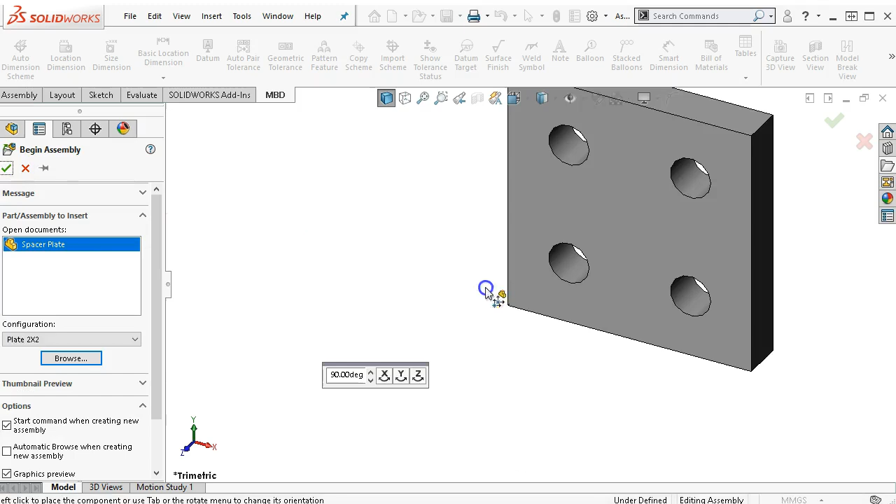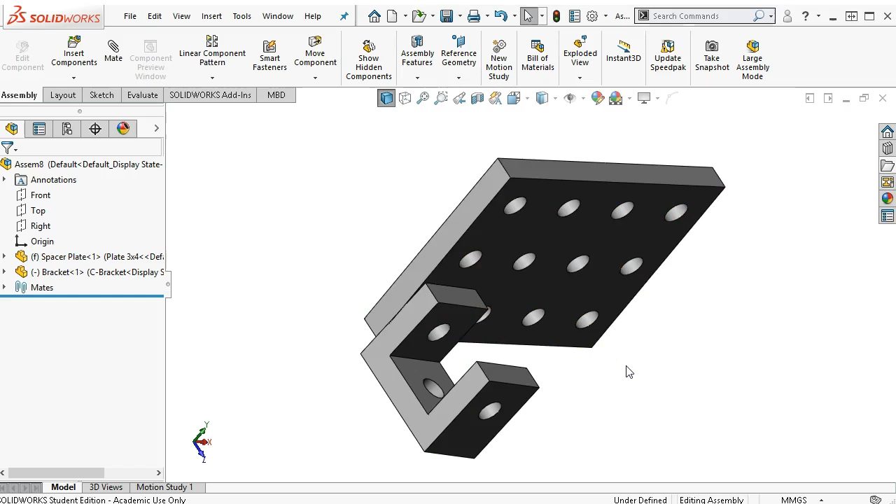Okay, so then the bracket, go back over to the assembly, insert a component. For the bracket, I'll probably go with a C. And then that can be the position. Go ahead and give it a parallel so it keeps it from rotating. Okay, thought I hit parallel, apparently not. Okay, make sure it has a chance to catch up then.

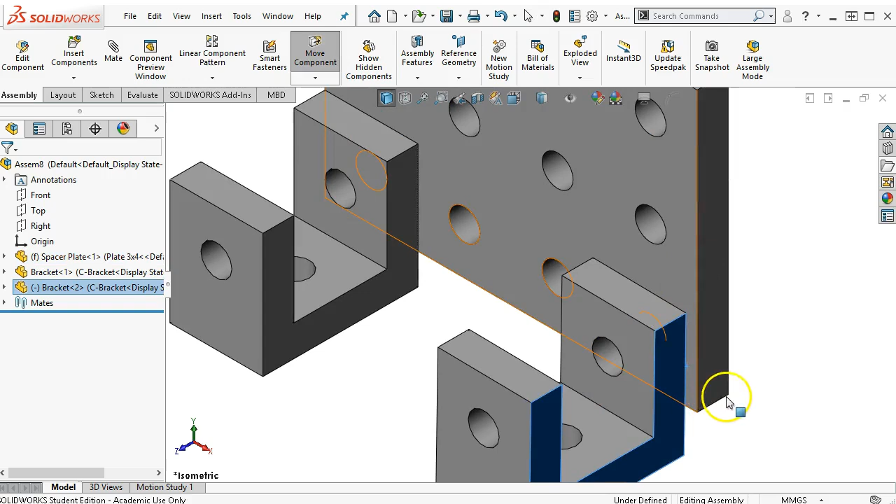Do the control select, we'll go to the other side, and it's not quite cooperating on that one. Alright, so if we can't get it to cooperate, we'll go ahead and apply it. Alright, so I either need that gap or to rotate around. Probably would have seen it if I'd brought it over. Alright, so 3x4. And then I'll bring in another.

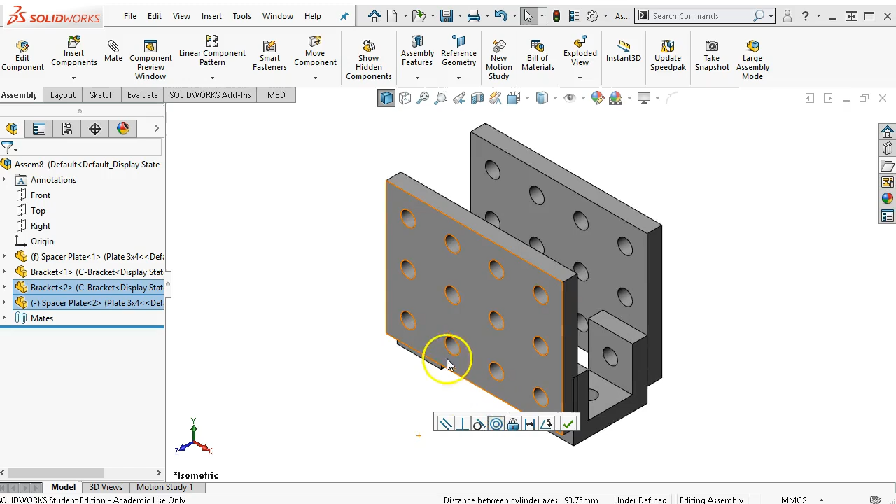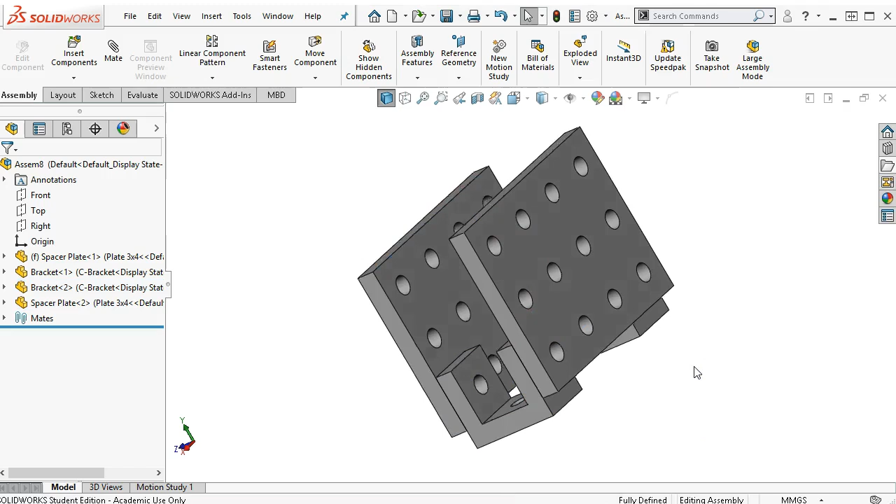And we'll go with the Concentric. Alright, so that's able to rotate and move. So we get the other Concentric in. Now at some point we start thinking about how we're going to put this together if it were not for pins. And so one of the, either a tooling plate or what kind of structure I'd want to use for this.

So right now with the pins we're going to be able to come both ways, but if I was to put threads on this side, then I would need to be able to go through. And then positional, well, we're going to have a little bit of positional tolerance on that size. Let's go ahead and bring in another bracket. I'm going to switch this one over to a Z-bracket.

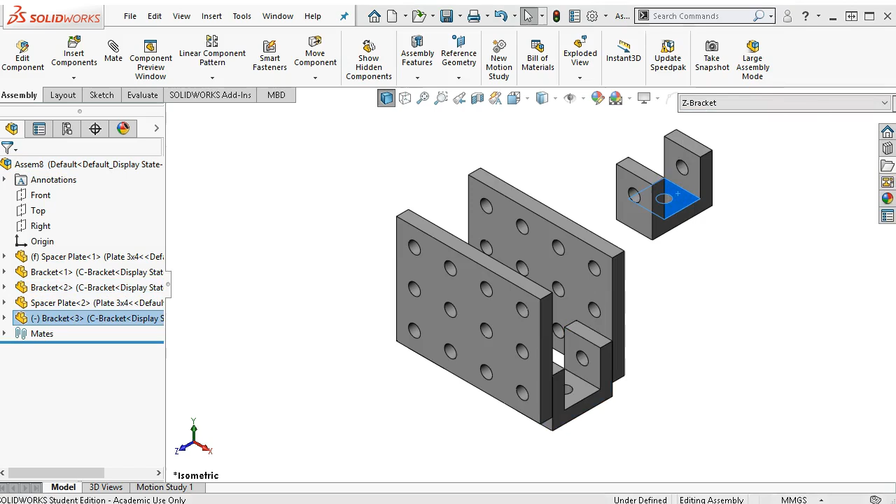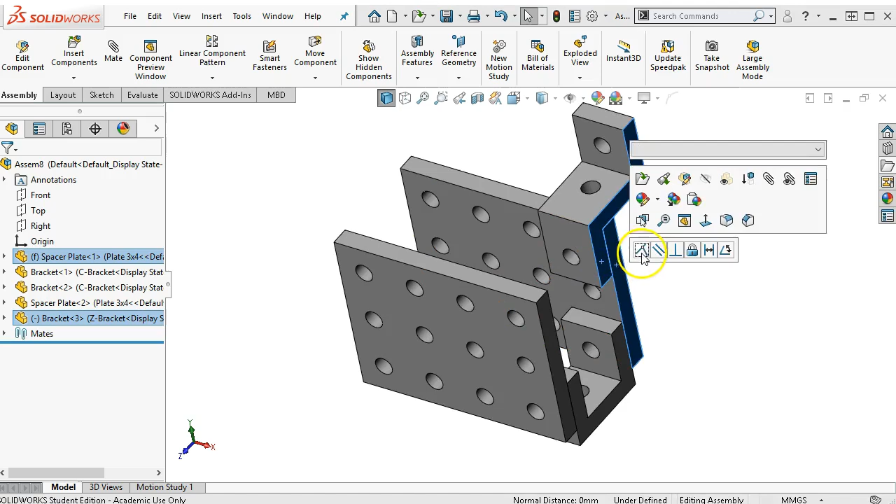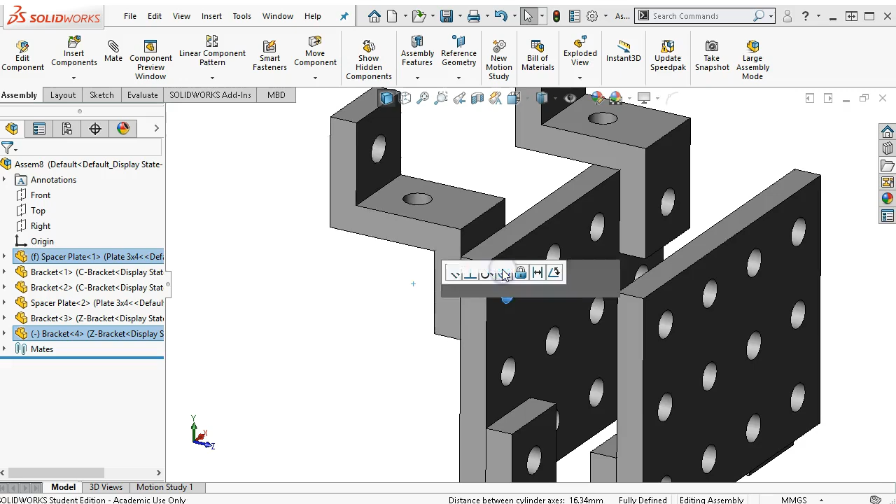And we'll see if we can get the stack-ups to work. And would like to have a few little changes be able to make along the way. So we'll see what this lines up as. Okay, and then the outsides can stay concentric, or coincident, parallel. Whichever. Okay, so not picking up that one. Alright, so I'm still kind of expecting it to pick up the mate references, but I might be making it too complicated too.

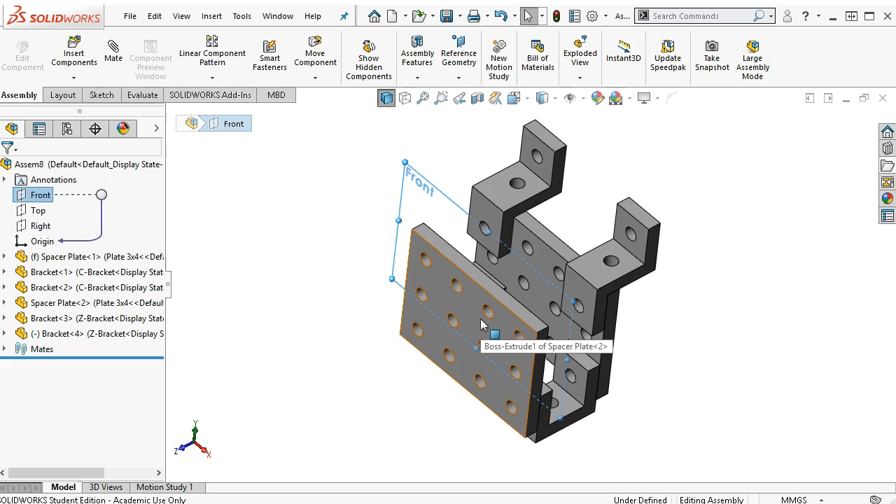Alright, so we need the spacing. Alright, so the front plane is on the back side of the part, so that doesn't help me with the stack up. I was hoping to be able to make a mirror, and in that case I really wouldn't need this other plate, at least right now. So maybe, just maybe, I'll go ahead and suppress that out. We can always remove the mates and come back to it.

Alright, so if I wanted to mirror all of this over, and there's symmetry and it's not going to be a left and a right part, then I would need to have some reference geometry. There we go. Plane. And thinking about it. Alright, so first reference. Let's see if we can set this up as a mid.

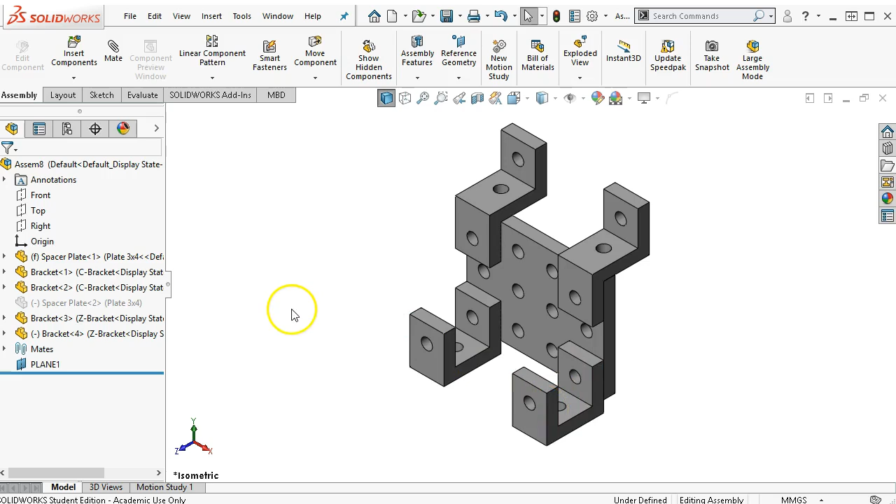And then if I pick the second reference to the outside, then we have a mid plane between the two surfaces, and that would give me something to mirror across. So even though I didn't set it up that way with the planes, we can make it work. Alright, so that gets added to the mix, and if I go over to a mirror components, the mirror plane is the plane that I just created, or if one of these would happen to be convenient, we would stay with that. And then we'll go spacer and the Z.

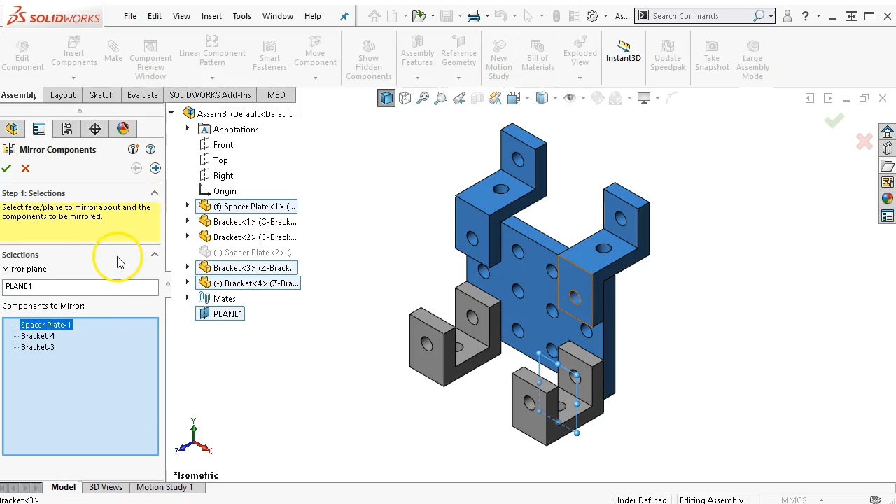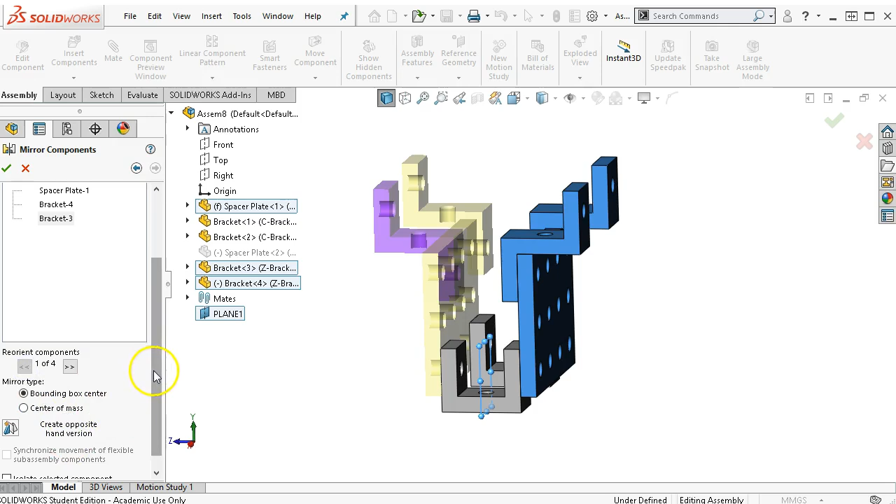Alright, and then available solutions. On occasion it will shift around. So as it moves things around, I think we're okay. And no, I don't want to create an opposite hand version. So if we needed a left and right, for whatever reason, it would create a derived configuration of that part and apply it.

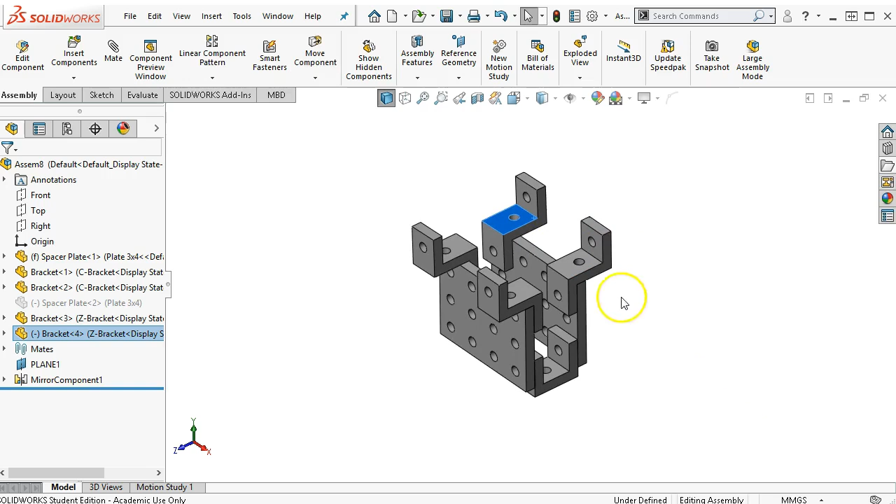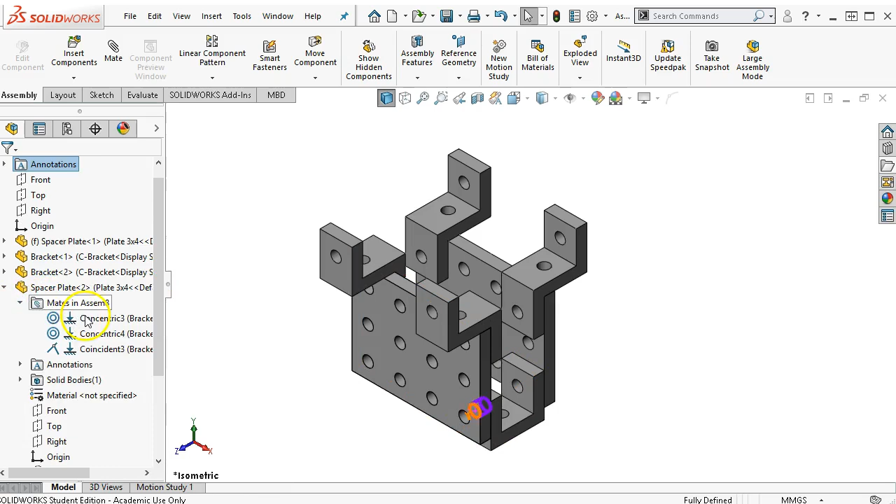Okay, so the fourth bracket, that one didn't pick up a coincident, even though I thought I got that in there. Or the parallel. Okay, so that one doesn't need to move. And then the spacer plate, if I were to unsuppress that, it's going to be a duplicate. So I need to just go ahead and get rid of its mates. So doing the shift select and then delete on the keyboard.

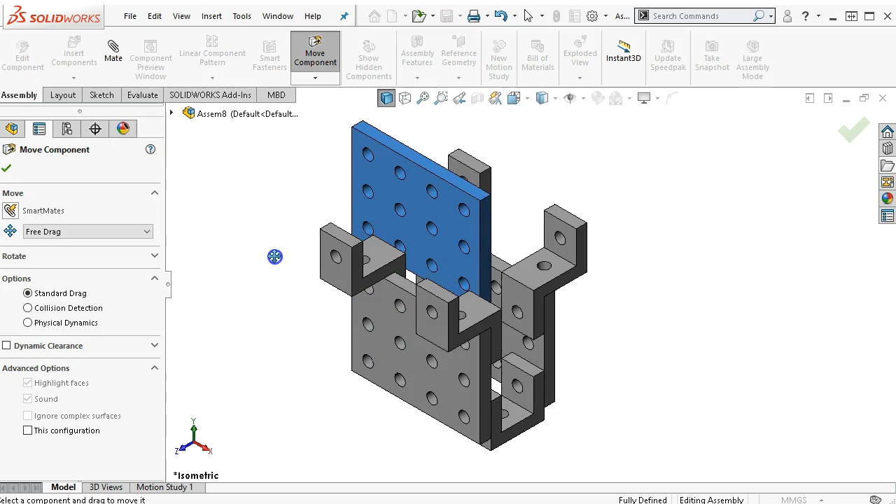See if the computer can catch up here. And we'll give it a yes to all. Alright, so since they're one on top of the other, I'm going to do a move component. Alright, and then we can stack. Let's see, I'm still in move, so that's not going to help me. Let's see if we have an angle.

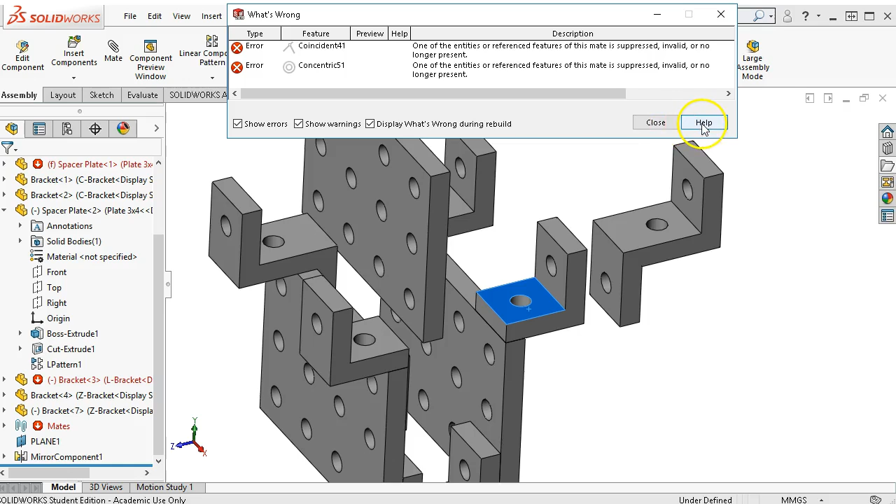Yeah, that's kind of what I wanted to see, is if I was going to be able to stack these up one way or the other and get back to where I could, let's just go with an L bracket. And it did it to me again. Got to remember to change components. Alright, make sure I've got the correct component selected before I switch over to my L bracket.

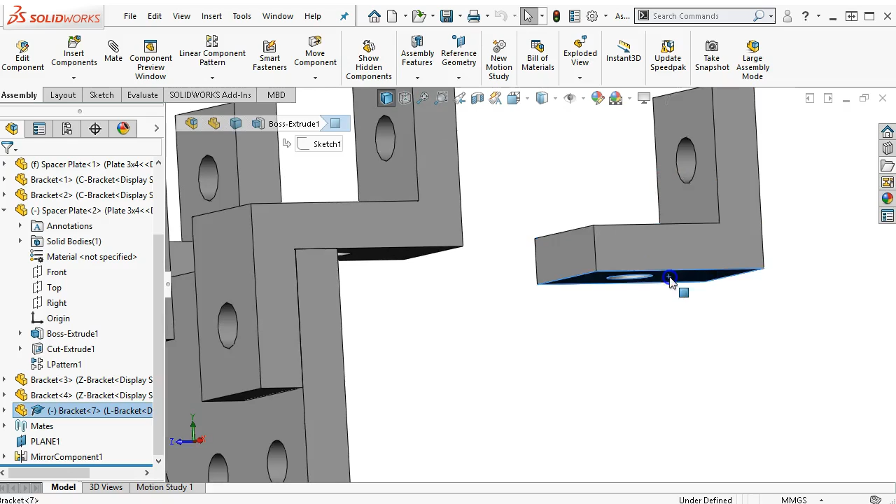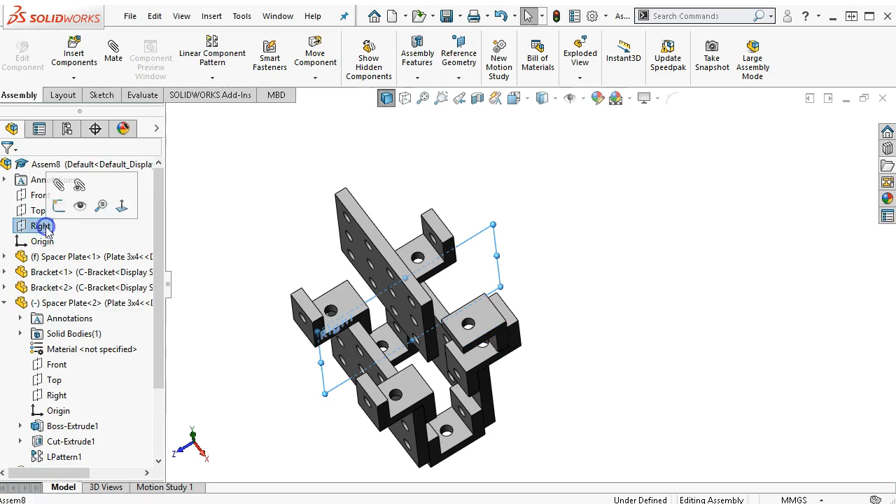Alright, so I'm going to line those up. We'll make that concentric. And then I don't really want to set the depth just yet. And I don't think we set up to be the right plane. I don't want to get too complicated. Well, actually, no. I'm going to say I don't want to get too complicated on the planes just yet, so

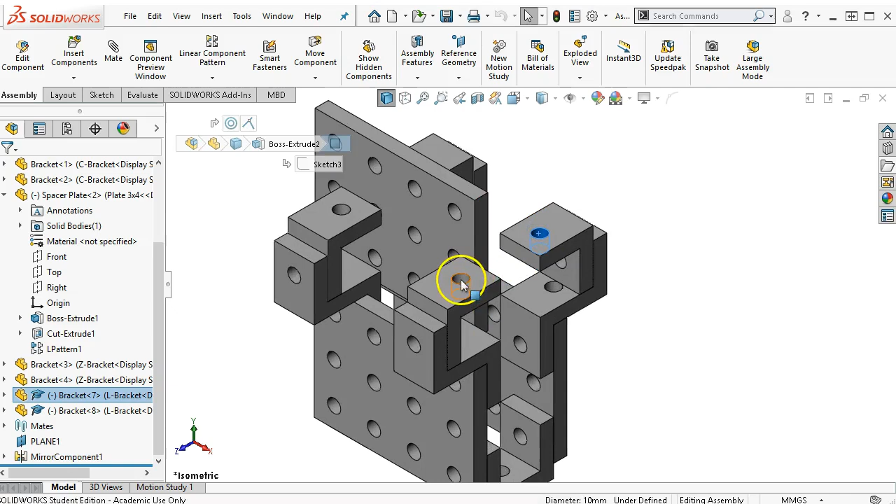alright, so they were saying 12 pieces. And we're pretty close to there, so even after I've created the mirror, I can go back into that mirror and add the components. So if I want to bring the L brackets in, and we go ahead and accept. And then the question would be, did I line those up to where it's on an even? So about 60 millimeters, that should bring it back up to the plate.

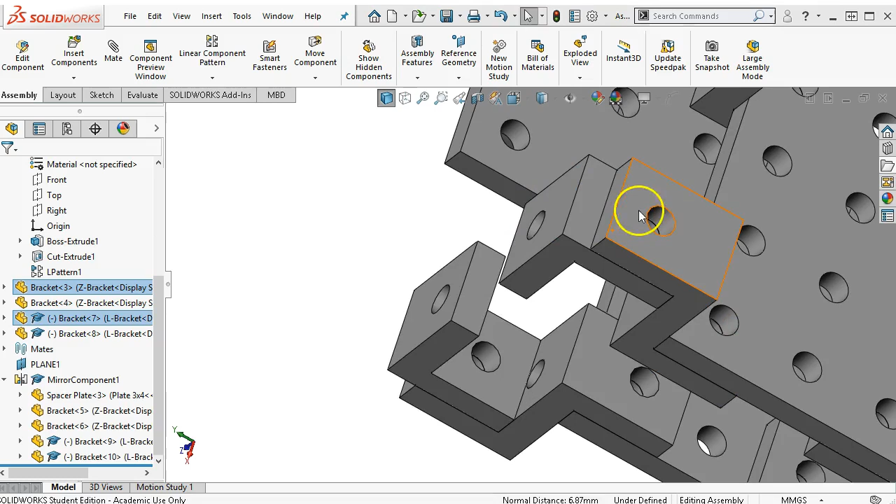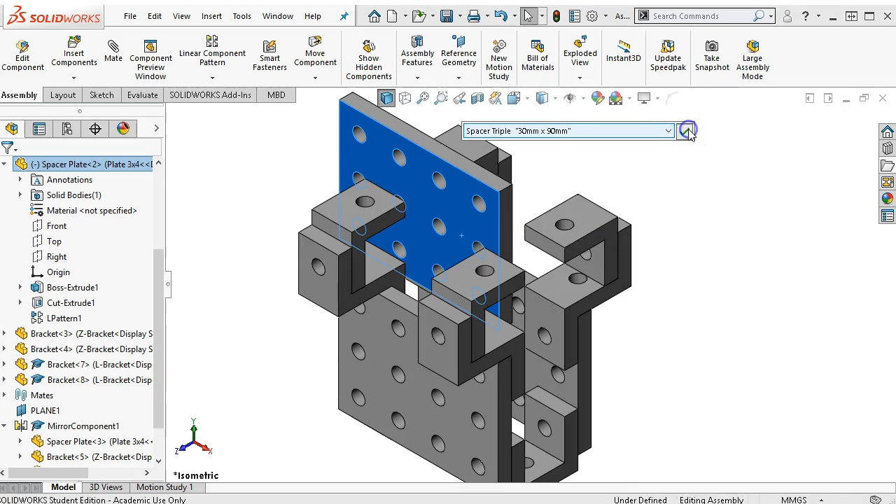Alright, so that being the case, I'm going to make that coincident, which will also make the mirror coincident. Okay, not sure what it had selected there, or if I got ahead of it. I'll go coincident with that one as well. And then this will go over to a triple. Yeah, still not sure what it's picking up there.

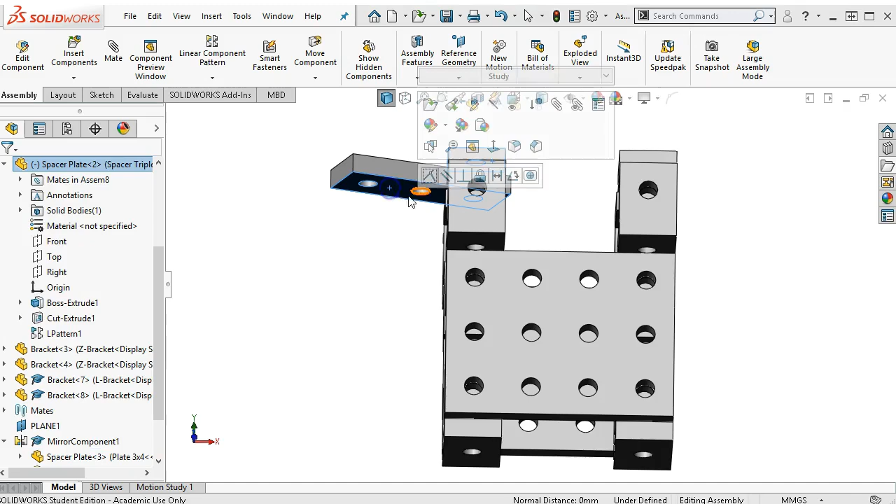Alright, so almost like I'm getting some ghost mates in there. Now I got a little bit of a lag on the screen, so those will be coincident. We'll see if my concentric stayed. Alright, so one of them stayed. I'll give it a chance to catch up. Alright, that looks good.

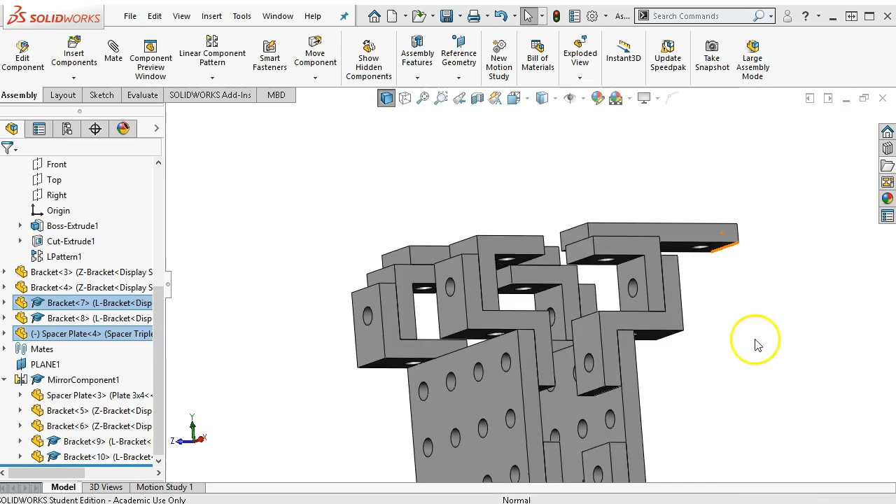Alright, so one more time, coincident. And the recommendation was to do 12 items. And I want this to be at least a little bit complex, so when we do the exploded view, create the drawing, bill of materials, all that kind of stuff, it has some complexity to it. Alright, those are all built up. Don't think anything's going to move.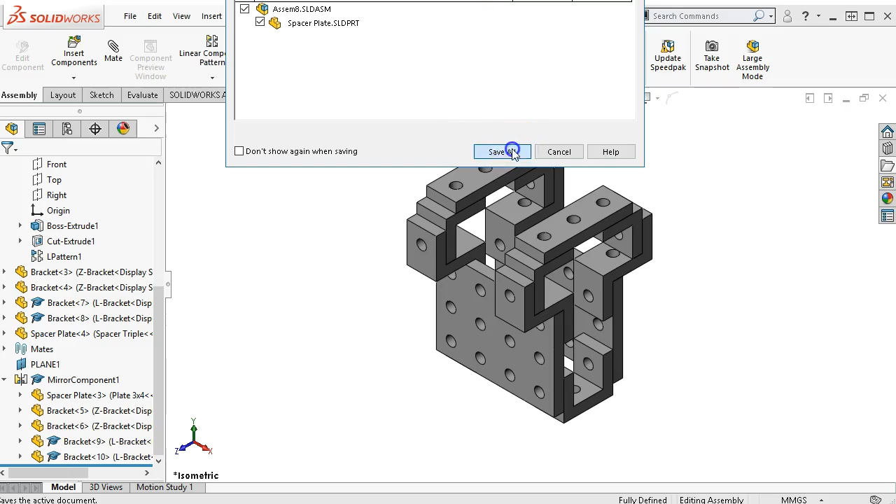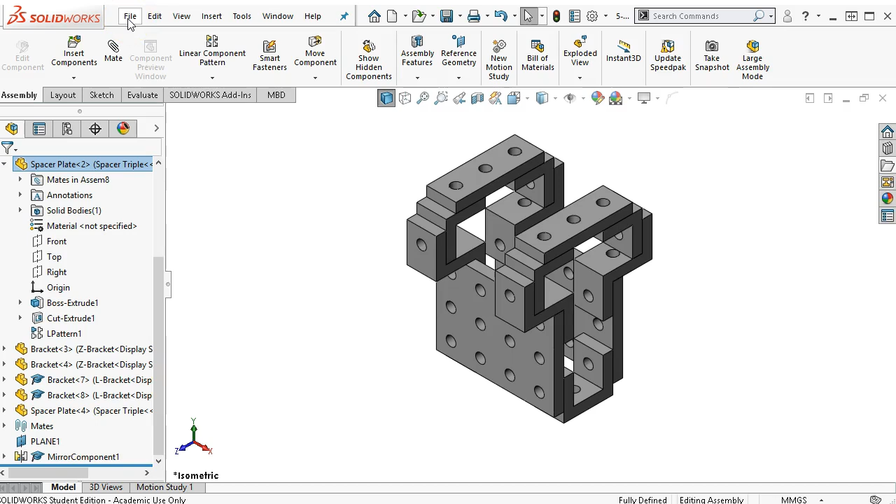So this is going to be my 5-9 sub assembly. Alright, so as we build this up, then we can add more components. Alright, so what makes a subassembly is that if I made 2 or 3 of these, or different combinations of these, when I bring them up to the next level in the assembly, these become subassemblies. So at this level, it's its own assembly.

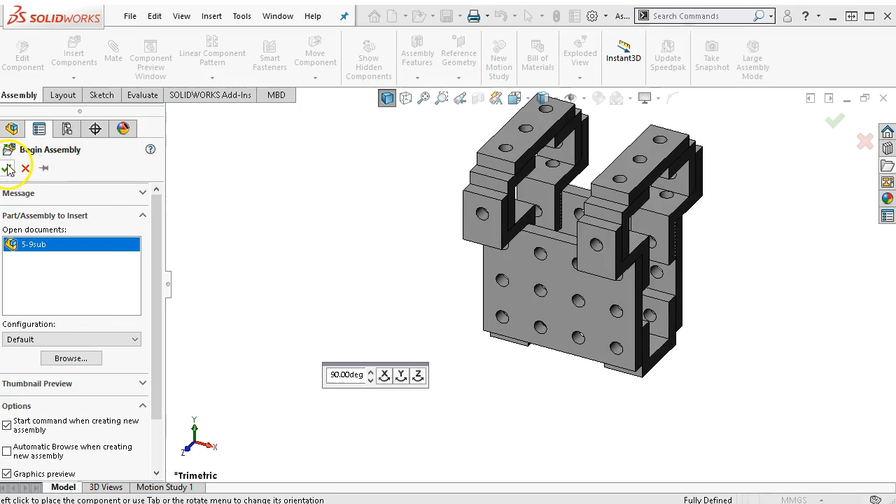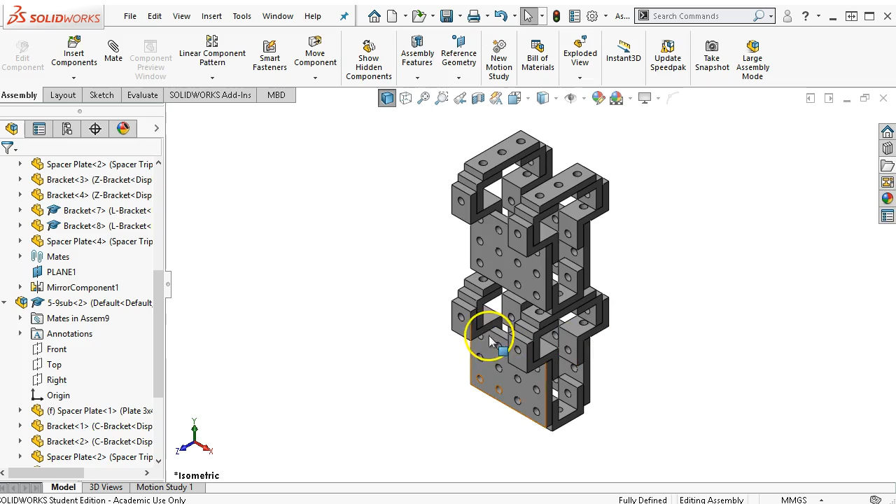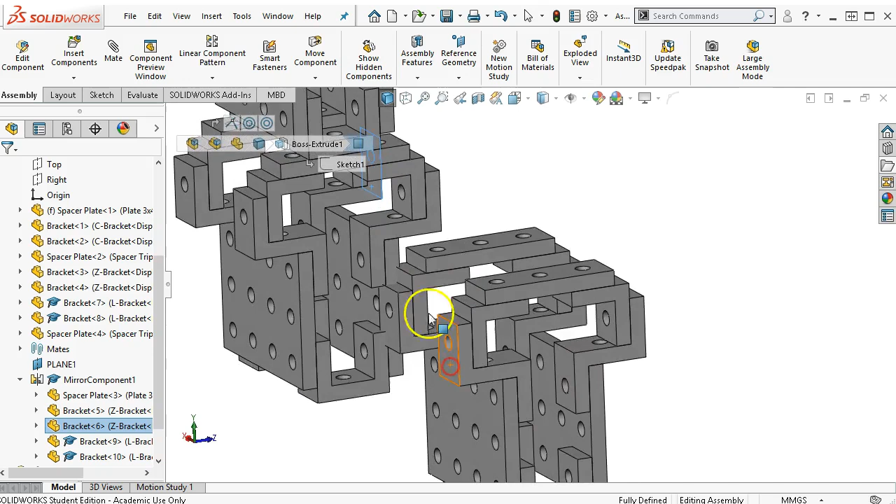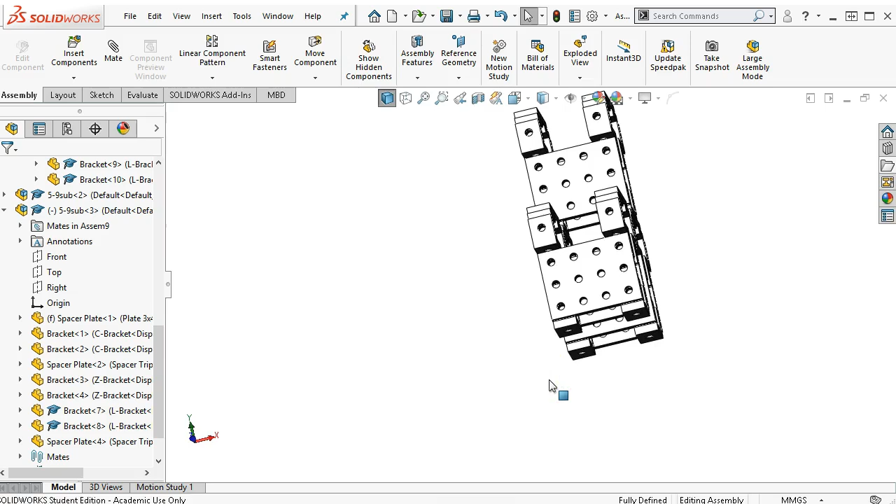Alright, so every one of these that I bring in, and probably if I'm going to get too complicated with it, the mate reference would be handy. And I lost that surface, so let's go. Okay, so I don't think we're going to go with all the pegs because I just made this way too complicated to go to the 40s as well as all of the 20s and the 30s, and so we'll just stay with the shapes.

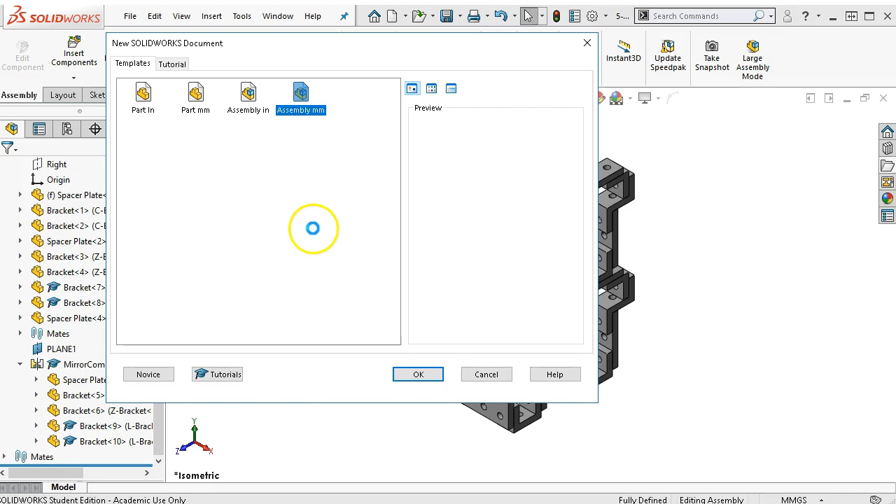Alright, so we can keep adding in subs. And so if I go 5-9 assembly. Alright, and then if there was a higher level assembly, we would have to give it a name as well. But it depends on how I'm organizing these. But just for an example, this becomes a subassembly, and as each of these changes or has different components added to it, then they naturally get more complicated.

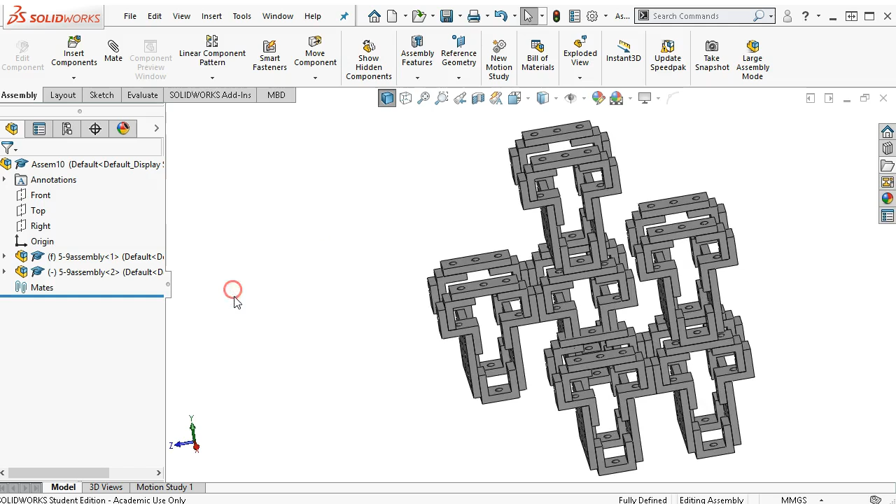So as we keep bringing these in, at some point it's going to be a test of the processor as to how well it can manage it. Alright, so if I get enough of these, then at some point I'll want to consider another pattern. And so the linear component pattern, we need to pick up a direction and a distance, probably in the 100, 120 range.

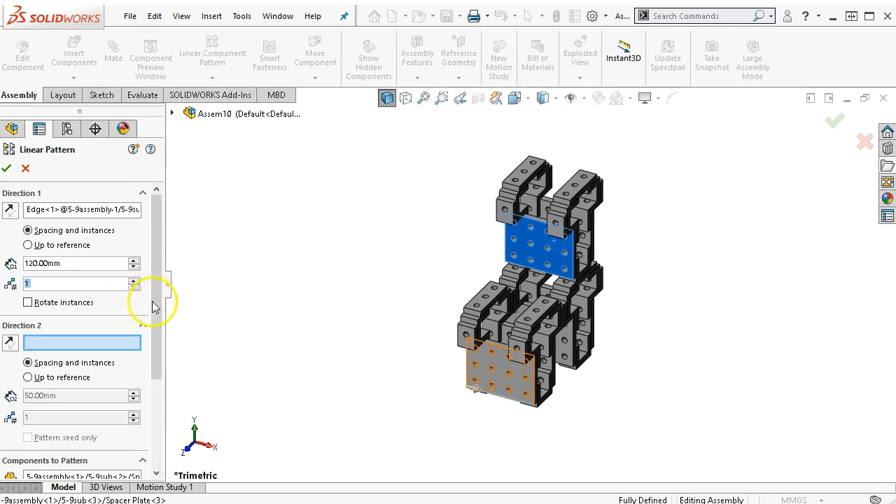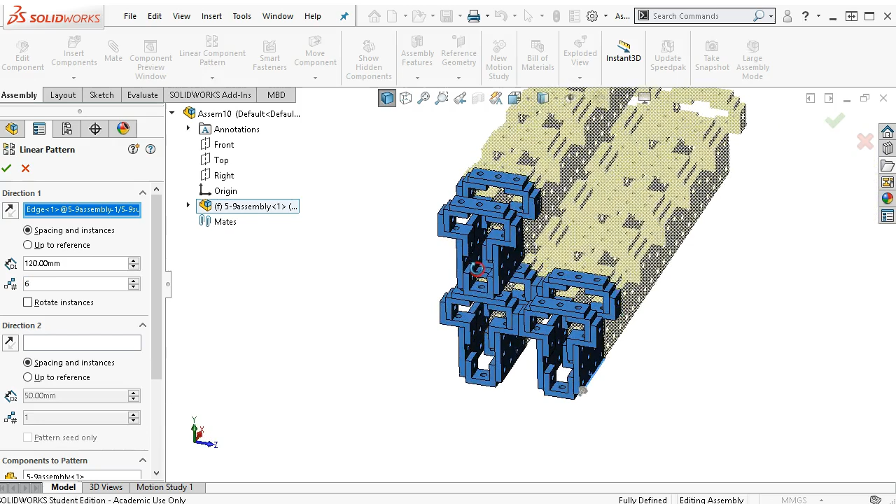And the items, just make sure everything's selected. We have the edge, and as soon as we go more than one, we're going to be able to stack those up. And then the other distance, I'm not quite sure of, but we will figure it out.

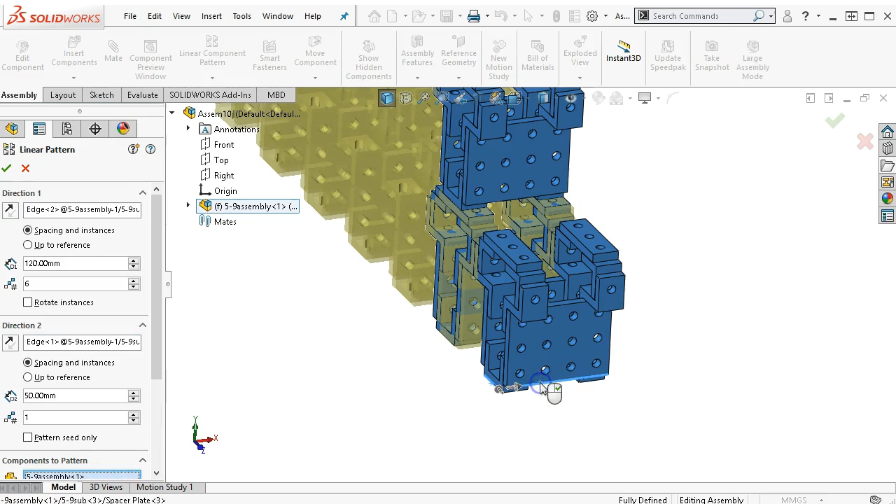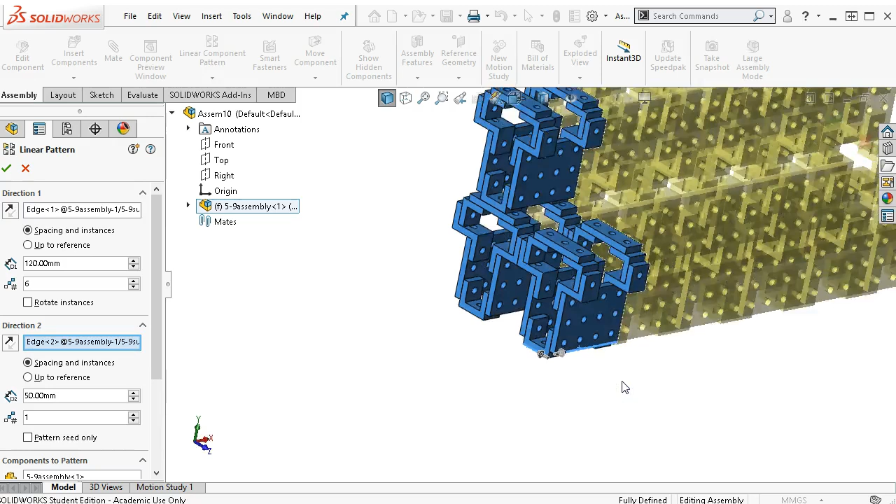Alright, so it needs to... I'm not sure why it turned the other way. I haven't... Alright, got a little button happy, or computer is still struggling. Alright, so edge 2 is going to be 3 units that way, and that one's probably going to be on the order of 200 and some odd millimeters.

And if I hit the tab, it's going to update. So another 20. Alright, so I can make these as complex as I want. And they're going to get really busy, and it's going to take up a lot of resources to run it, especially when we do the hard edges. So it looks pretty cool, but I don't really need that one.

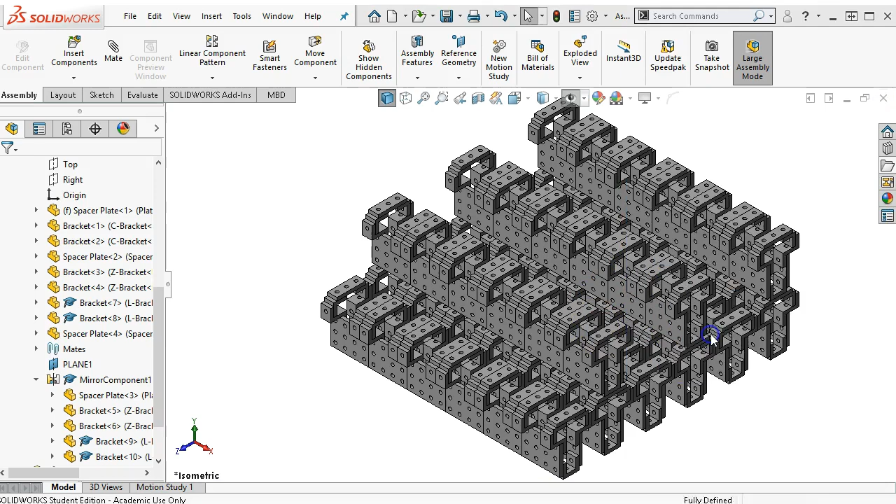And it just switched over to large assembly mode, which means that we're over 200 or 500 parts, so it's not going to resolve everything if it doesn't need to. So let's not save that one. And I really am not that interested in this higher level assembly, other than if we want to create an exploded view of it, we have the choice of just doing the sub-assemblies, the 3 components, or we go back to this level and we make our exploded view here.

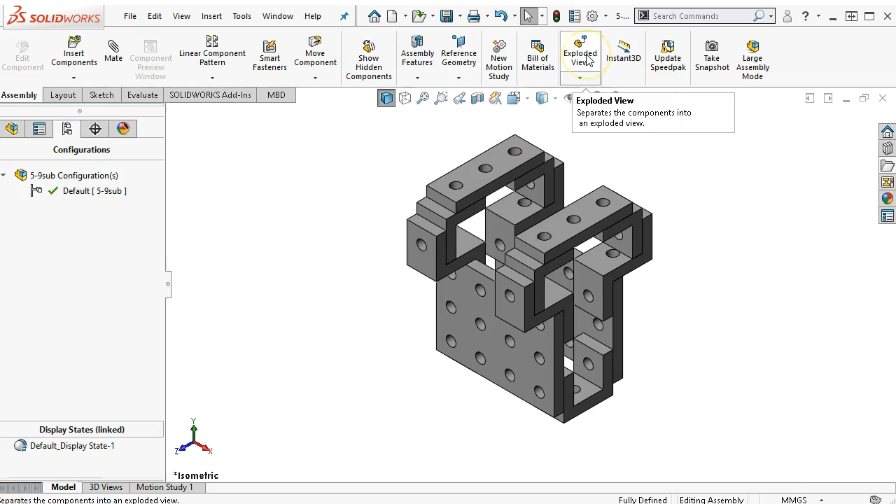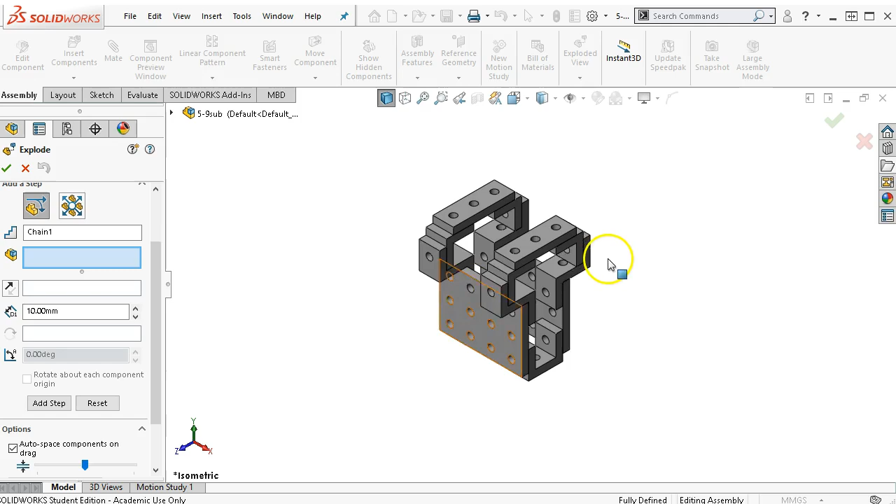Alright, so under the configuration is where the exploded view will end up living, and we want to actually initiate it. So the things that need to go up, we have a chain 1, and right now we're set to auto space the components, so I do like to try and check that one first, and then this is the relative position between them. So for this, in chain 1, I'm going to pick up our components, trying to make sure I'm not grabbing the arrows. Doing a pretty good job of picking the other things over. There we go.

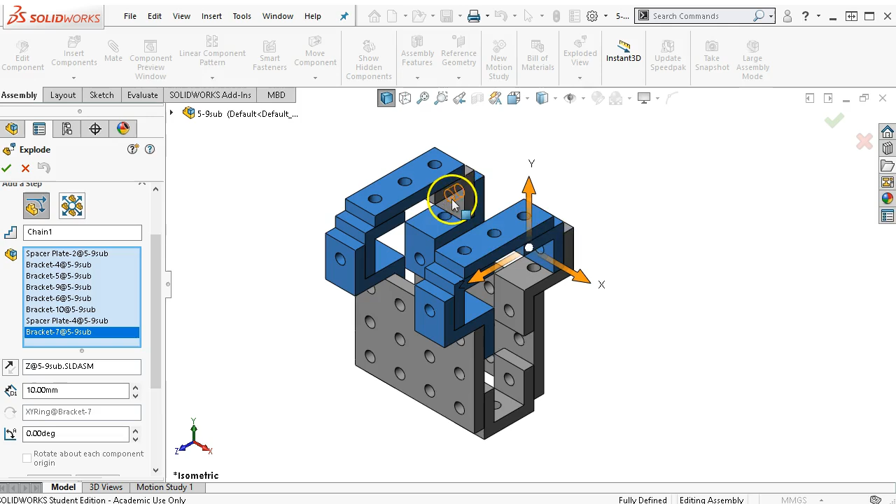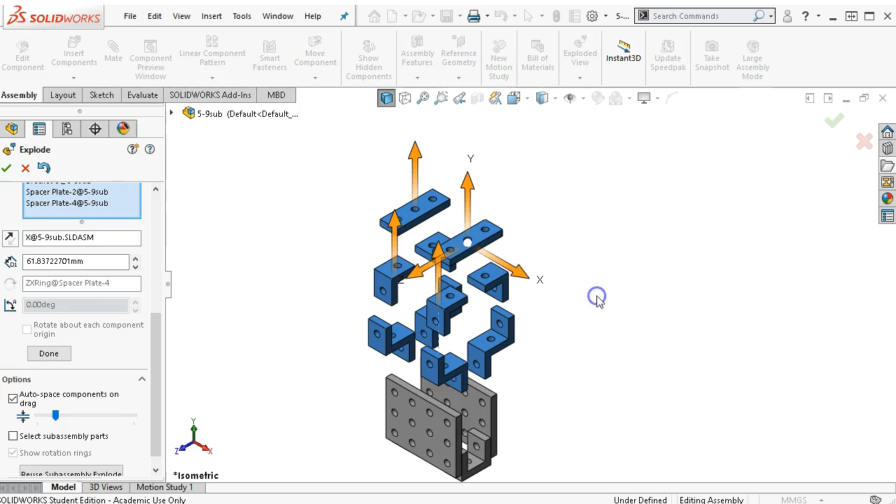Alright, so if I drag that out, then that gives me the spacing, and it picks up the brackets, picks up the chain, and then if I auto drag the spacing, I can move them up and out a little bit. And we still have the arrows, so I don't want to get too carried away. If it'll let me, nope, it's just part of the mix. Alright, so we'll call that one done. Oh, and then it shifted on me.

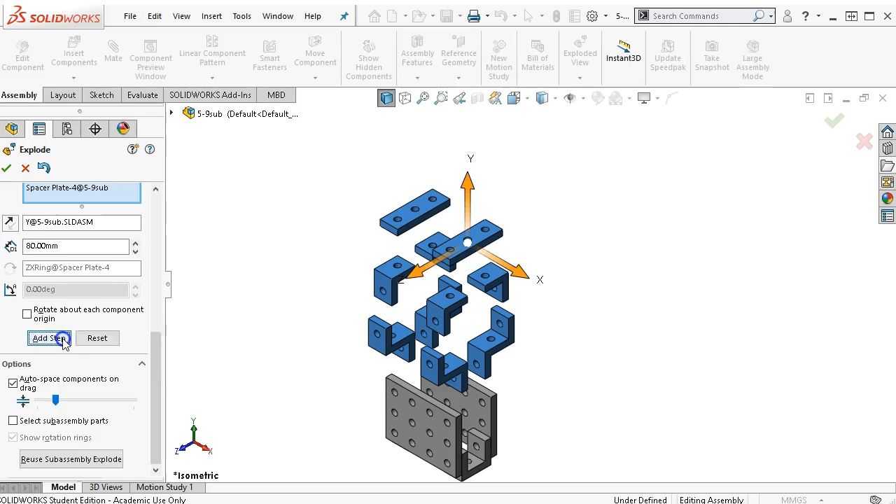So distance, let's go up 80 millimeters and a little shift, and it is in the Y direction, 80 millimeters. So, alright, and then if we need to, we can close up or work a little bit on those. Alright, so the individual pieces then, since I'm not going to auto drag, we'll just go with, be careful of the rings, because those will allow the component to rotate.

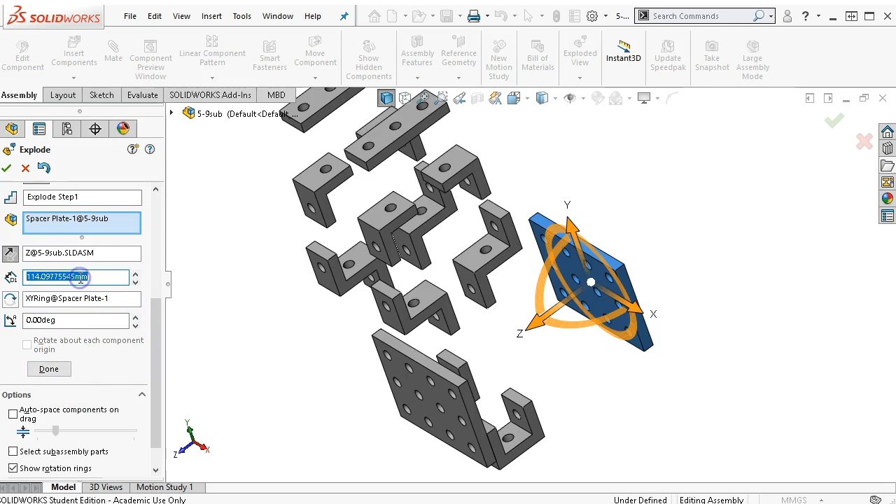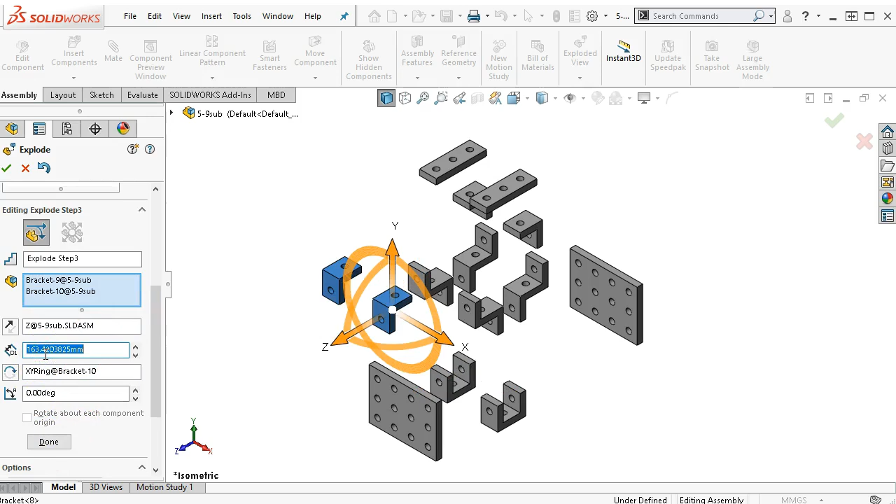Oh, pick that one up. I should have clicked to done. So let's undo that one, and we'll give it a distance of 100 millimeters. I kind of like the symmetry. And done. Okay, and then a few more components. Maybe we'll take these two and pull them out of the mix. I don't know that I'm making it better at this point, so maybe 80 millimeters that way, and done.

Alright, so nice thing is that even if I get this not looking great, I can always add another and use this as a base reference for my first try at it. Okay, so let's see what it looks like under trimetric. Not that great. And then dimetric. That's not too bad. A little bit of clutter in there, but it's decipherable. That one got away a little bit.

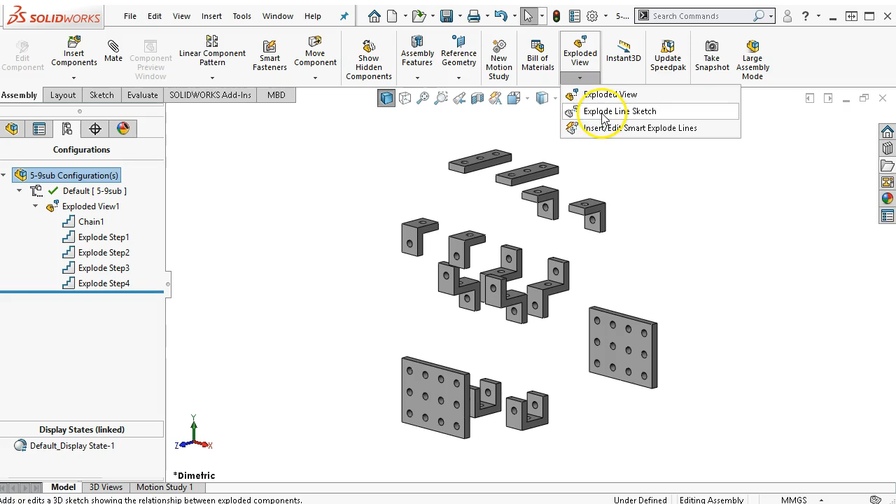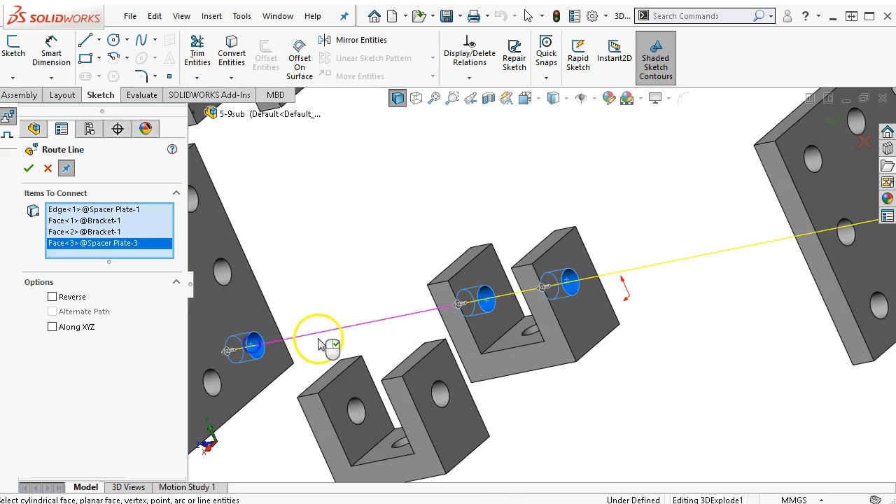Alright, so at this point I'm not too interested in the jog lines. When we look at this, we have the exploded view, we have each of the chains, and if we did decide to put in an exploded line sketch, then the items to connect, we're going to need route lines between each of the stages. And I'm going to turn off the XYZ, which usually will keep it going linear. And then we accept. And that creates the 3D explode.

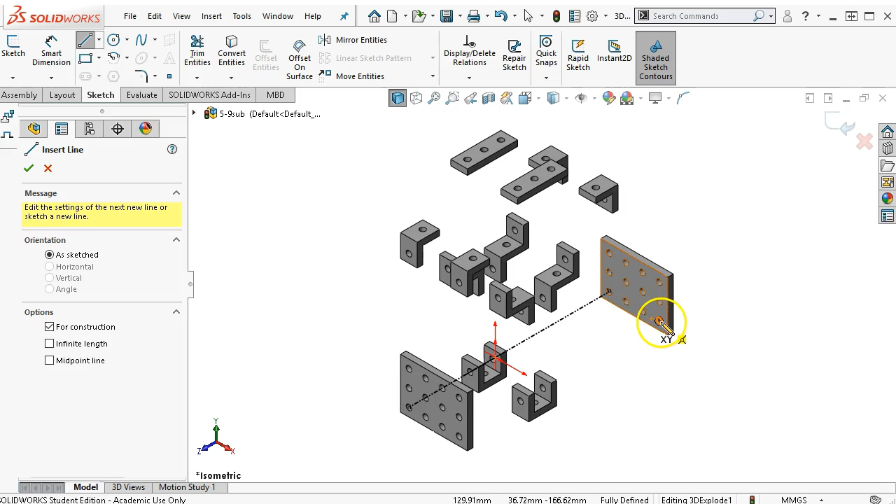Alright, so if I go back and we look to edit, I'm still in the explode. So we can either go with a center line, and if I pick up a center line, this is going to act as a 3D sketch, so I can see that floating origin, and we'll just go point to point. Alright, and I'll give it some definition.

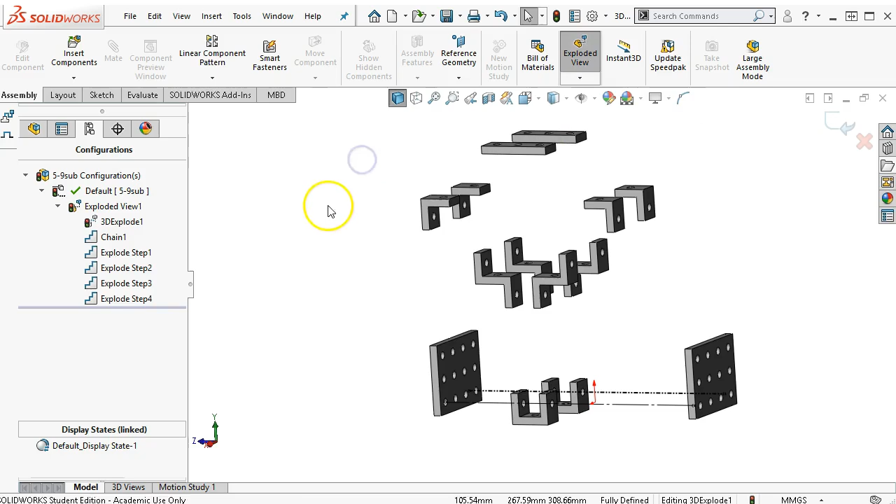Alright, and then if we were to do these, we would have to jog. So if I go back, let's see if it'll let me back into... So it still thinks we're in the exploded line sketch. So pick up the center line. I like my chances of building that out. So a direction, and then we'll come down a little ways. And then you need to pick up to that center line of the bore.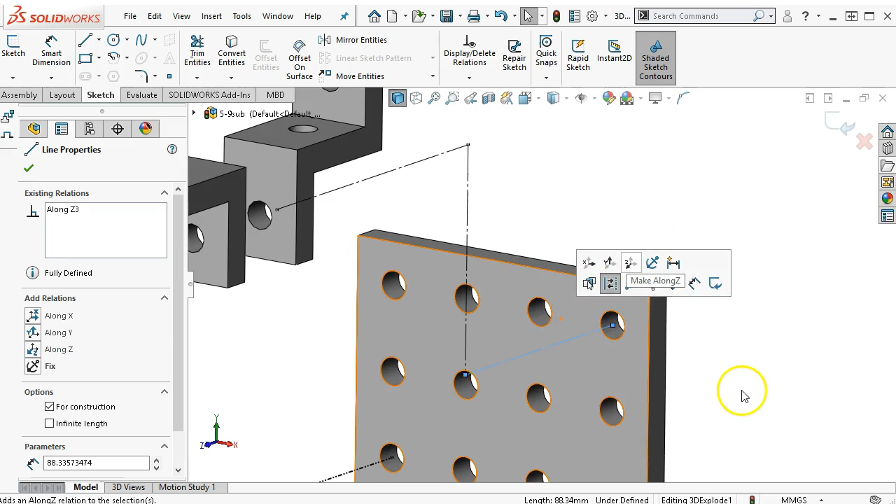And if I make that along my Z, then that should bring it back to having those jog lines. Alright, so I don't want to get too crazy with the jog lines, but that gives you kind of a sense of how it's created. Alright, so we accept the exploded line sketch. We rebuild, make sure everything's up to date, and then we'll make sure to save this.

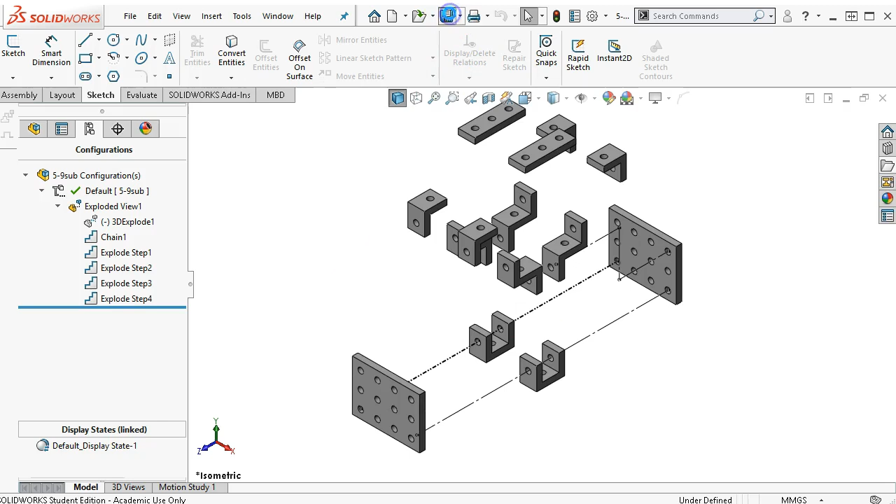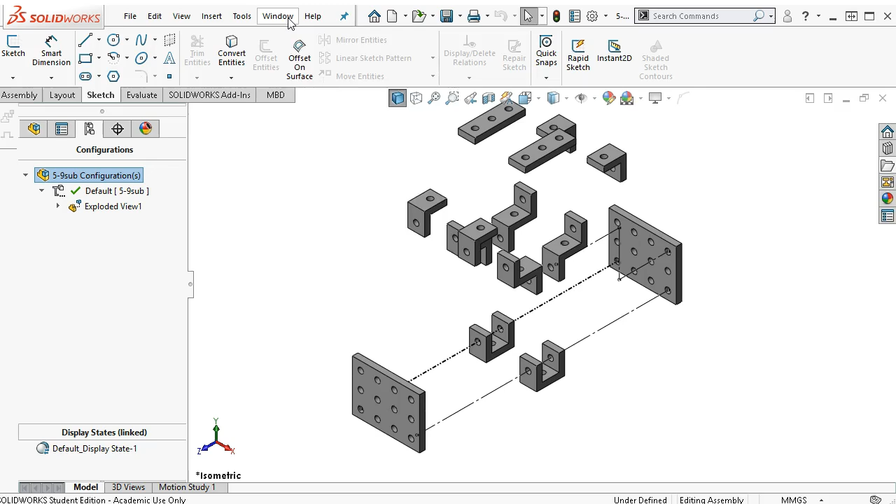Alright, at the next level, if I needed it, and one of the reasons I created this was, we got a little bit of extra in there. So one of these came over. Which one? Alright, so right now we have the default, we have the exploded view, and neither one of these should have picked up that exploded view sketch. And this is the piece. So that pretty much looks like it.

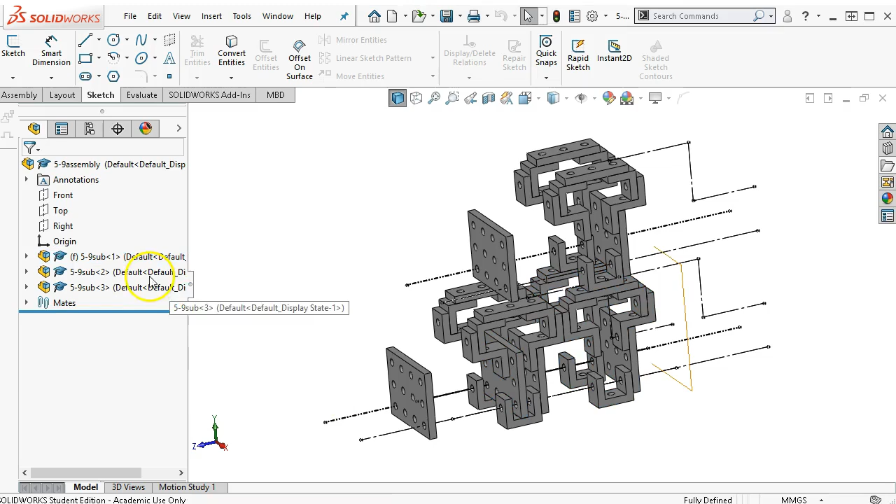Let's go into the component properties. Set to rigid. Have the display state and the default. And I don't see it picking up the exploded state on that one because everything should be able to collapse. And we haven't created an exploded view on this one. Alright, so we'll jump back.

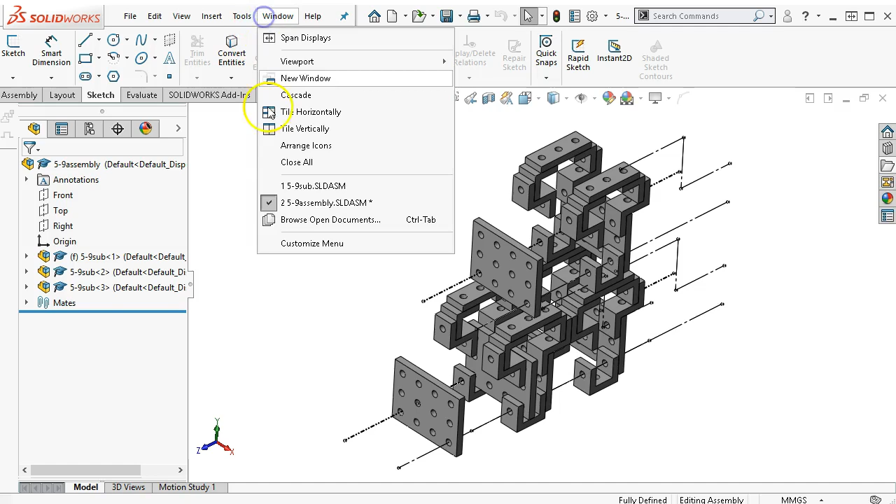I'm just toggling back and forth in the window, and if I double click, that collapses. And that one stayed. Interesting. Wonder if it has to do with the whole mirroring thing. Alright. That's pretty wild. Alright, so I've got some diagnosing to do. The top spacer plate is showing as underdefined, so worst case is it can rotate, which shouldn't have lost too much there.

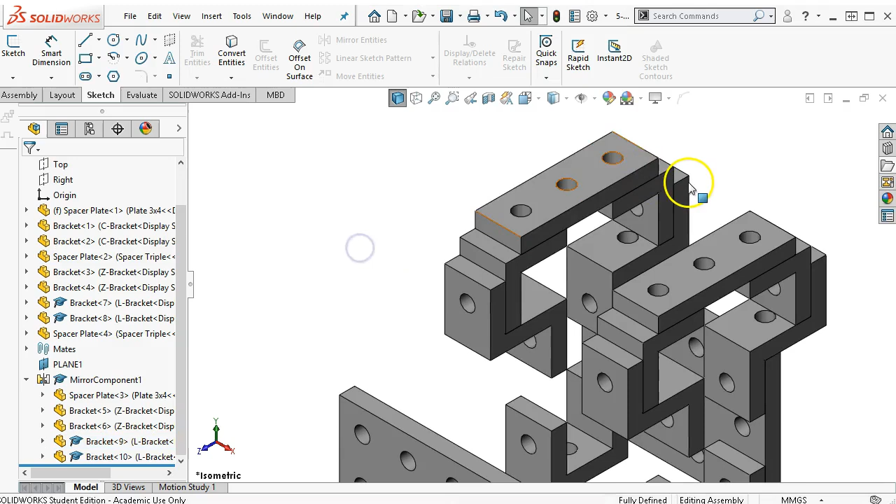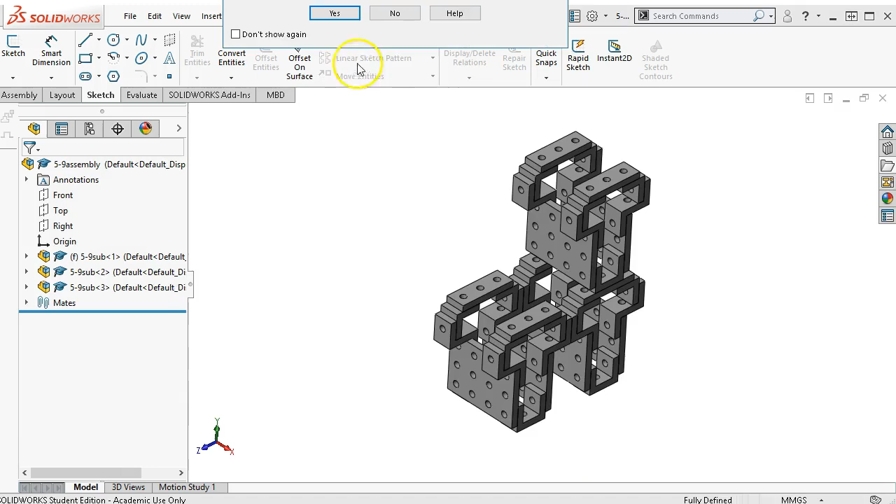Alright, well I don't want to spend that much time diagnosing this with the pieces. So, we'll edit, make sure everything's there, we'll look at the preview. Yeah, something in the mirror, it didn't update or it didn't process, so let's go ahead and save it. We'll come back to the assembly. And then if I create an exploded view, this will get kind of messy. Okay, so that's what I was looking to check in the properties, is that it wasn't already set.

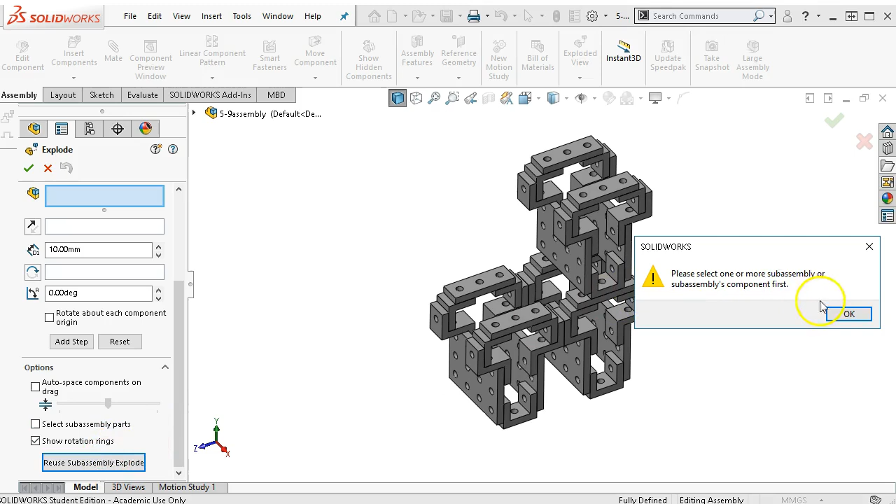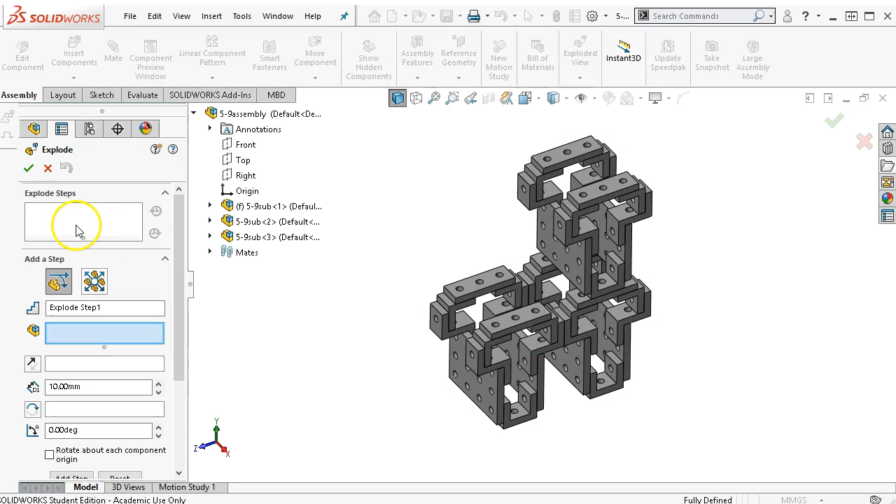So if I create an exploded view, then there should be reuse the SubAssembly explodes, and the SubAssembly component. Let's go with the second one there, because at least that won't get too messy, hopefully. And we'll accept it. Alright, so we have that one selected, reuse, there it goes.

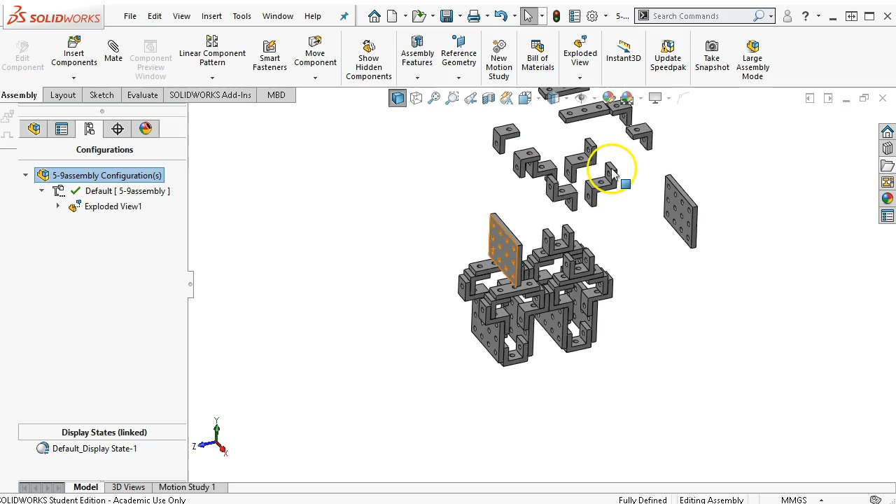I'm going to go ahead and hit OK, so we have the exploded view that is just the one on top of the others. And you can see how that could get real busy and very distracting if we went through all of them. So double click, it comes back, we save, and then you can go through. So if I wanted to add to that mix, maybe I only want to explode, so let's double click or right click and explode. We'll go back in and edit the feature.

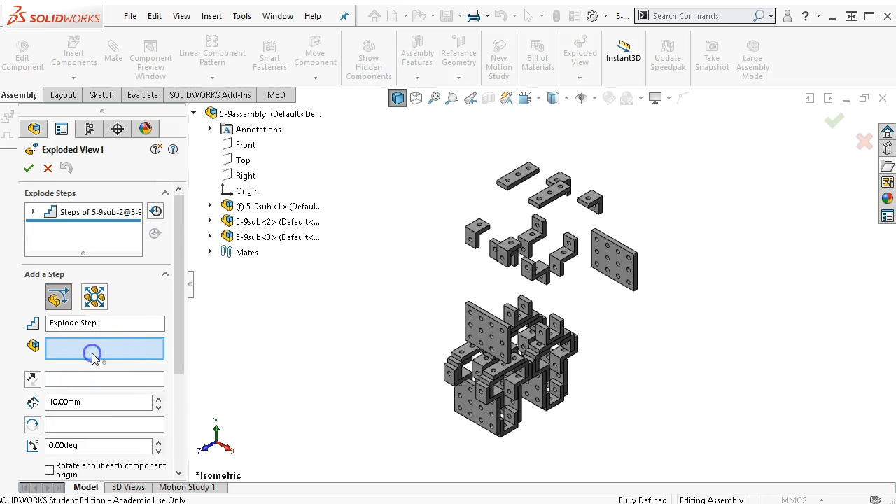And then the next item, I'll just grab the third one and we'll pull it out a little ways so it has some separation. Alright, so if I want to detail, if that helps with my visual, then that gets me where I need to go. I don't have to do all of them, but I can show the individual and then collapse them back.

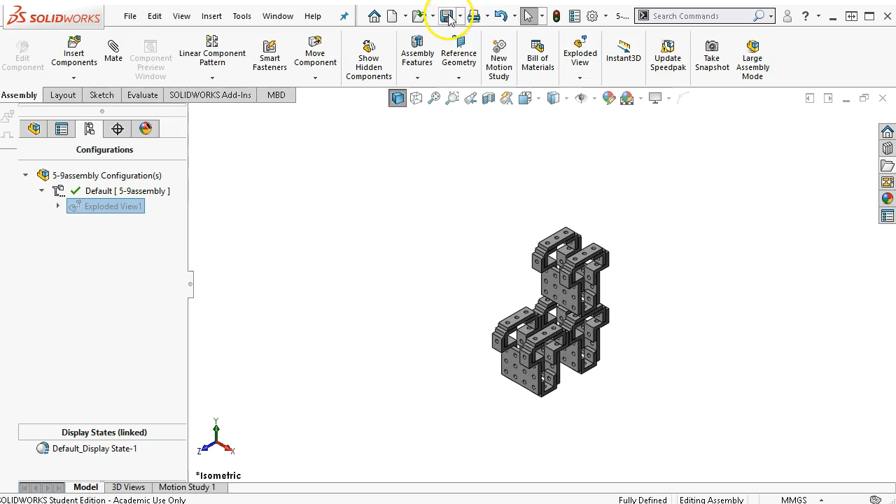Alright, so the takeaway then is that we don't need a separate file for the explode and the assembly. They are one and the same, and when we take this over into the drawing, we will activate the explode in the drawing view and make our detail, our bill of materials, whatever we need from this shape.